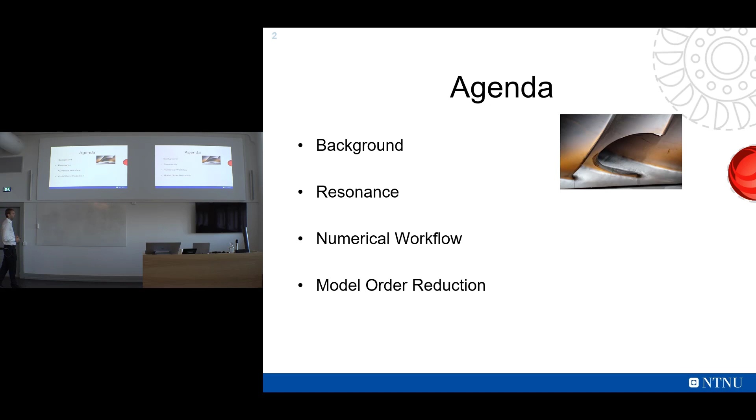Again, welcome everyone on our committee, professors, family and friends, to my PhD defense, titled, as said, Numerical Simulation of Fluid Structure Interaction in High-Head Francis Turbines. It's quite a mouthful, and hopefully it will make a little bit more sense in about 45 minutes. The setup will be similar as earlier today. We'll go through a little bit on the background. We will look at the mechanical phenomena of resonance. The main part of the presentation will be a numerical workflow for simulating these phenomena, before we will end with a little bit on model order reduction.

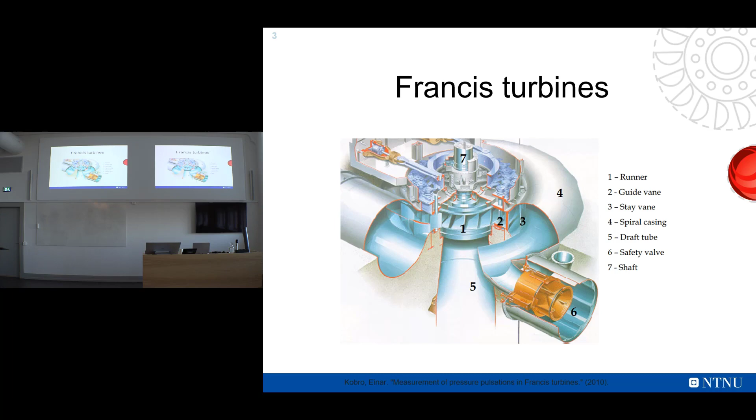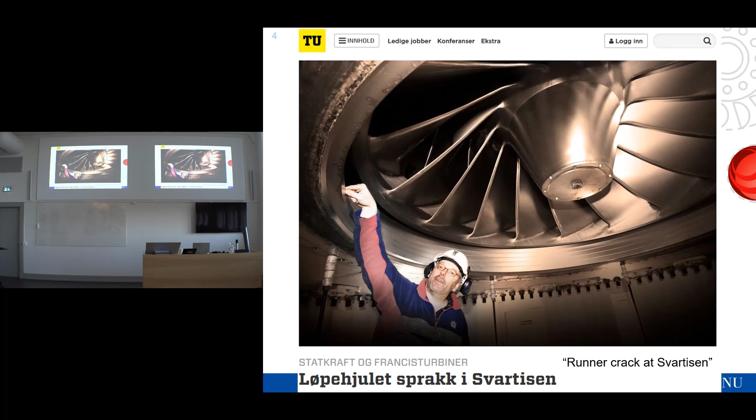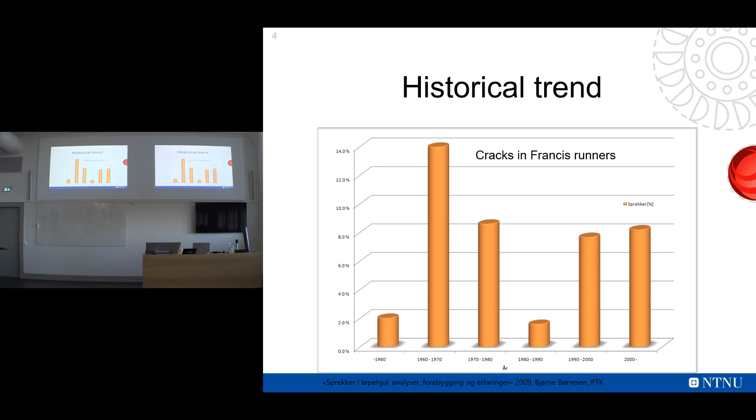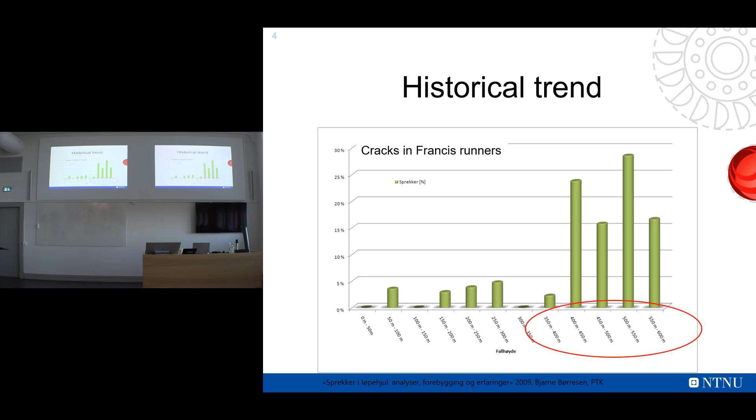This is what I mentioned earlier. Because you have something that is rotating inside some stationary components, you have some interaction between the two. So every time a rotational blade passes a stationary blade, something happens. And it's easy to imagine that there has to be some acceleration of the fluid, there has to be some deacceleration of the fluid, pressure pulses that are created and propagated through the system.

The thing is, we now have turbines that fail. We know that RSI is the reason or the main dynamic source of load, and we even know the frequency of this phenomena. But still the turbine fails. So somehow we are unable to calculate the actual load of this phenomena. And now we have narrowed the problem into what I'm going to talk about today, calculating the load inside these high-head Francis turbines.

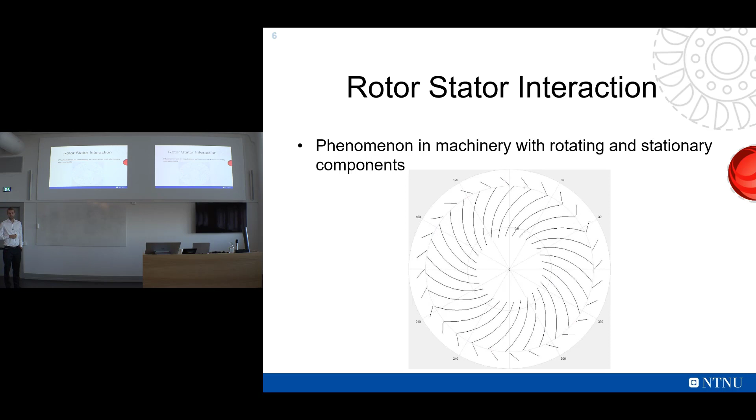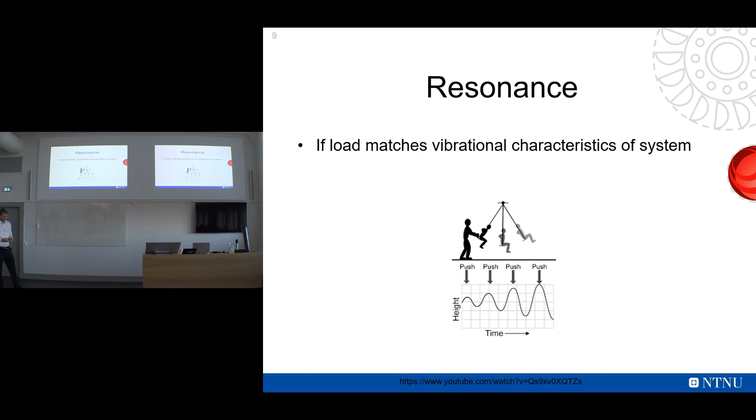Next up is resonance. I guess most of you have heard of resonance. If you want to explain this in one sentence, we could say if a small load is applied at the right place and at the right time, then the amplitude of vibration can be magnified outside of control. You could have catastrophic failures. In most textbooks, this is visualized using a swing, because everyone intuitively understands the swing example. Also as illustrated here. And everyone can see why this isn't working.

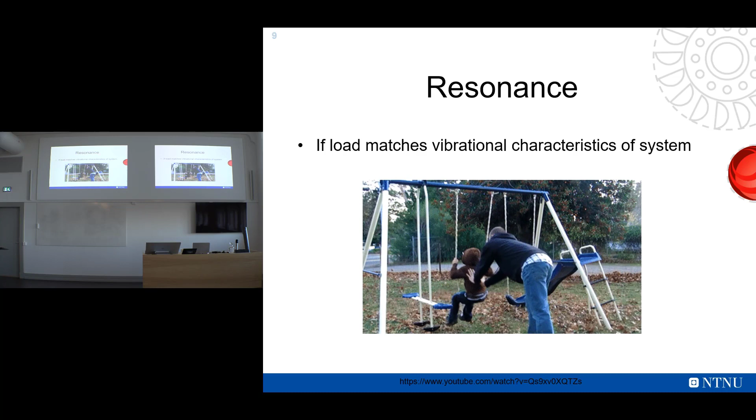The guy here, his father, I guess, is pushing at a frequency that is way too high. If he was a little bit more patient, the swing would gather momentum and the kid would have a better time. Resonance you'll find in all systems. Researchers in California have recently discovered that if you don't adjust your step, you'll spill your coffee within the first 10 steps.

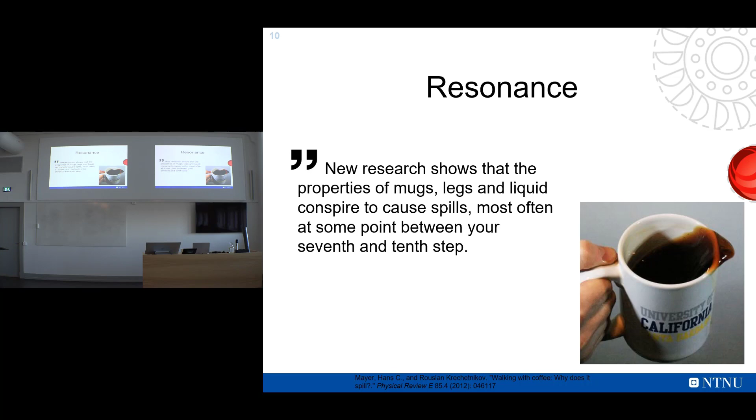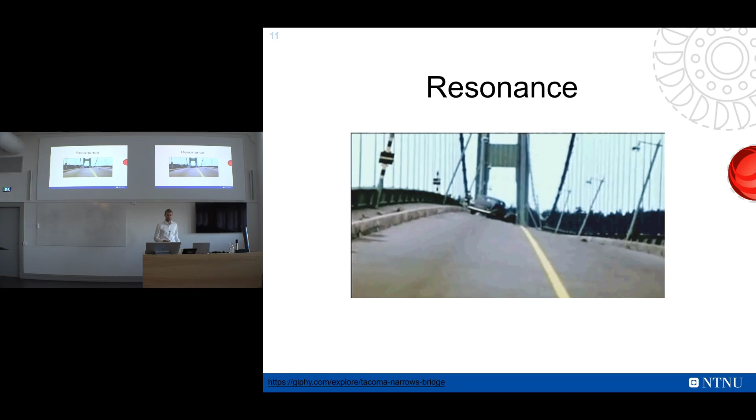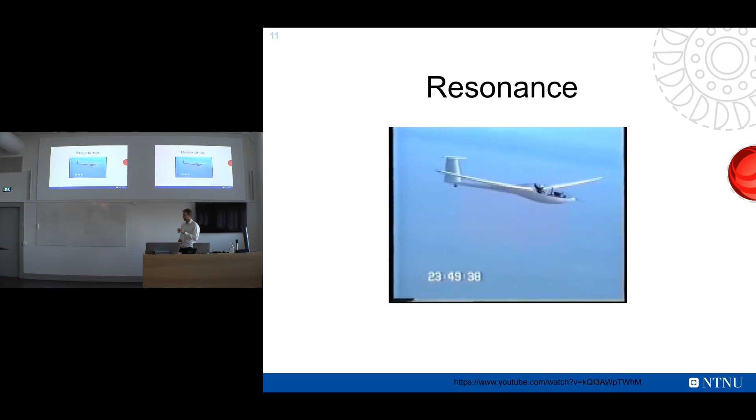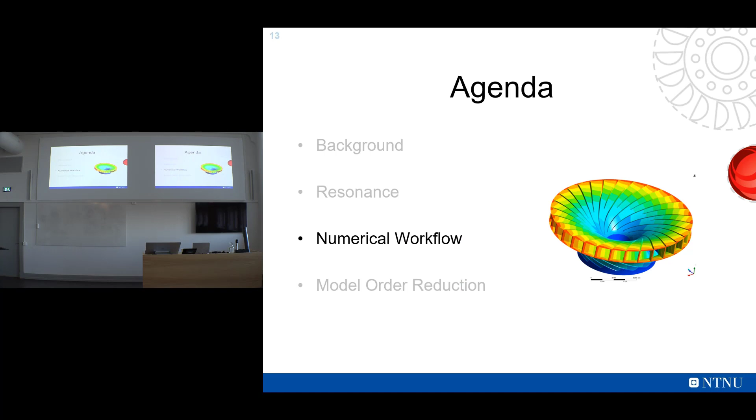So now to the main part, the numerical workflow. First, I'm just going to mention the geometry we've been working on. First of all, we've been working on the Francis 99 model runner. It is located here at the university. It's open source. You'll find geometry, experimental data, everything online.

What I have focused on primarily is the onboard pressure taps. So alongside one channel, we have several pressure taps that can measure the pressure inside the runner, and that's the load, that's the pressure field we are interested in. That's what makes the blades fail. Additionally, we have been looking at a simplified model of a blade named the Francis hydrofoil. It's a linear hydrofoil, and it is also open source, geometry online, experimental data online. And in this experimental rig, we have looked in more detail at the physical phenomena of damping.

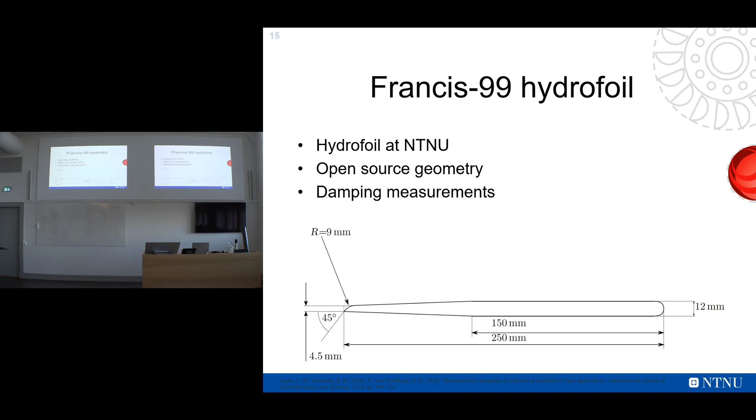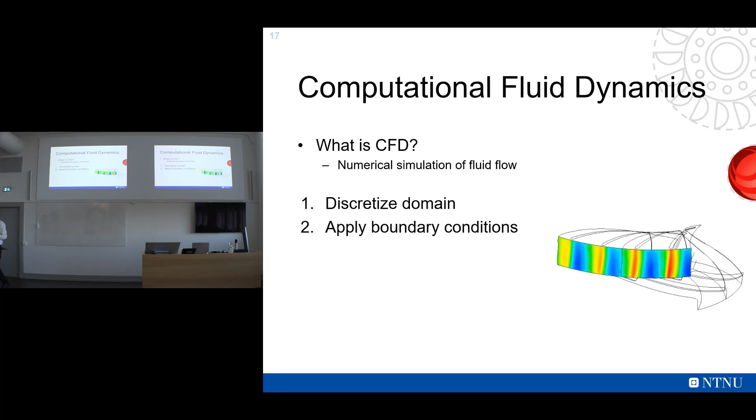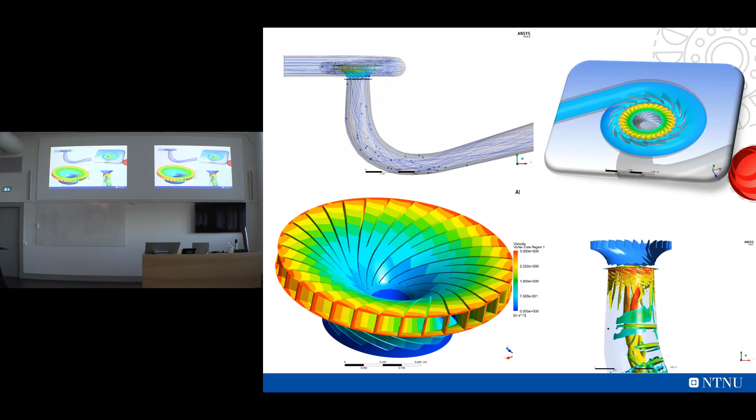If you're going to break it down to a series of simple steps that you have to go through, you have to discretize your domain. In all numerical simulations, you have to take a part of the real life and you have to discretize it. You have to apply some sort of boundary conditions, if that's mass flow, if it's pressure, rotation for that matter. And finally, you solve the Navier-Stokes equations, which are the governing equations for fluid flow. When doing CFD, you can get everything you like in the flow field. You can get streamlines, you can follow particles, you can look at pressures, you can look at turbulence phenomena, and so on and so forth. So it's a wonderful tool if used correctly, and it is becoming one of the most important research tools in fluid mechanics and hydraulic research in general.

You can find all this, but my main focus, as I mentioned, has been on the pressure inside the runner, and specifically the pressure in the 4 points that the experimentalists have gathered data.

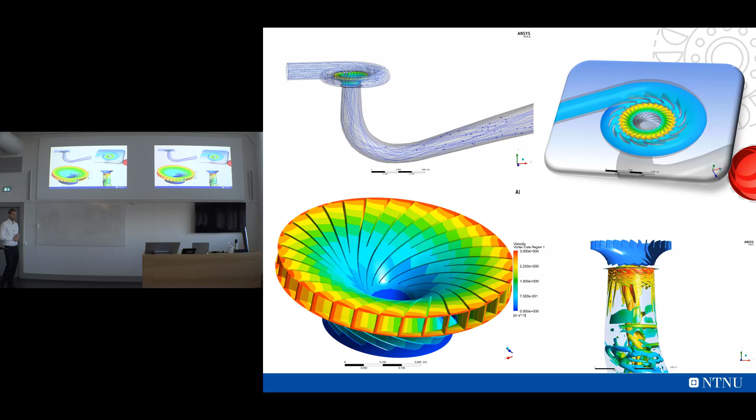Here you have an animation of the pressure field. A couple of interesting things. You can see, first of all, there seems to be an up and down, oscillating motion through the channels, which means that if we were to plot this in one point, we would see some variations. You can also see that there is some sort of rotational motion here. There seems to be some global pressure field.

The channels are not experiencing the exact same pressure at the exact same time, which means that there are some variations in the circumferential direction as well. We'll get back to what this means a little bit later on.

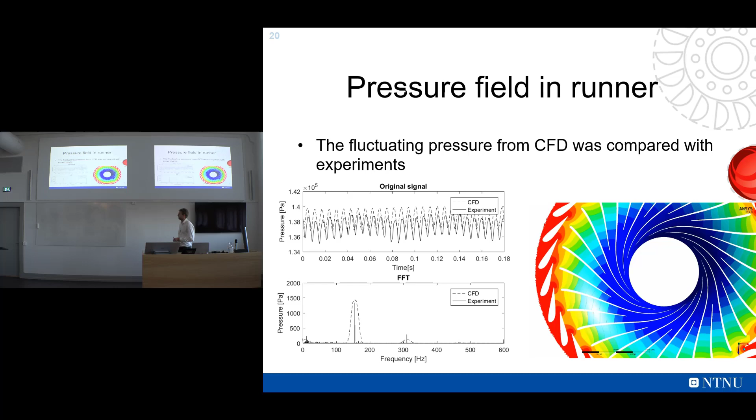If we pick one of these pressure taps in the runner and we plot the CFD data with the experimental data, we get a very good correspondence. There is a slight offset that's due to the boundary pressure condition, which is basically just a numerical artifact. If we plot this instead in the frequency domain, we see that the amplitudes and frequency correspond very, very well.

But what's going on here? For some reason, we are under-predicting the experimental pressure by 75% or more. So what is this pressure? What's the phenomenon that we are unable to simulate? This is my first paper, and of course back then I had no clue what was going on. Hopefully we'll see in a while what that pressure is.

If you look at all the pressure probes, these are the pressure probes sequentially along the channel. Every single pressure probe, this is the amplitude of the second pressure harmonic, is consistently under-predicting the experimental pressure. And not only under-predicting the pressure, but also missing this trend. The trends aren't even the same. So it's not a factor of error. In experiments, we see an increase in some of the probes in the channel. In the CFD, we do not.

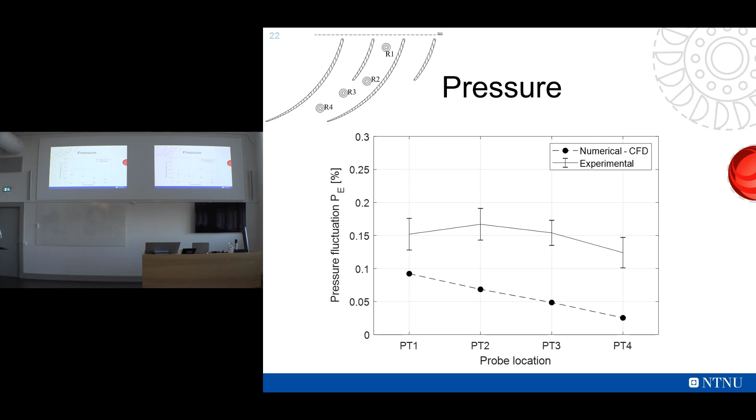So this is basically the background for the project. Because if you remember resonance, if a small load is applied at the right place and at the right time, then you can have a catastrophic failure. So if this is the right time, and we under-predict the load by 75%, then our lifetime estimators will be useless. And that was the basis for the further work here.

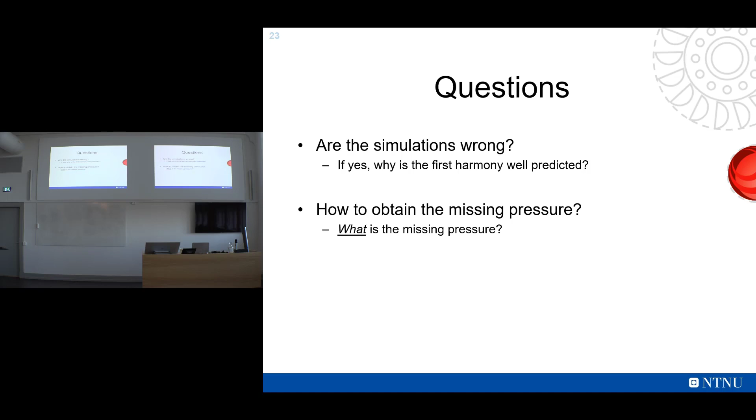And we did have some questions. What is this? Are the simulations wrong? What is the missing pressure? And we will get back to some of this. Moving on, we have the modal analysis. Modal analysis is a study of vibrational characteristics.

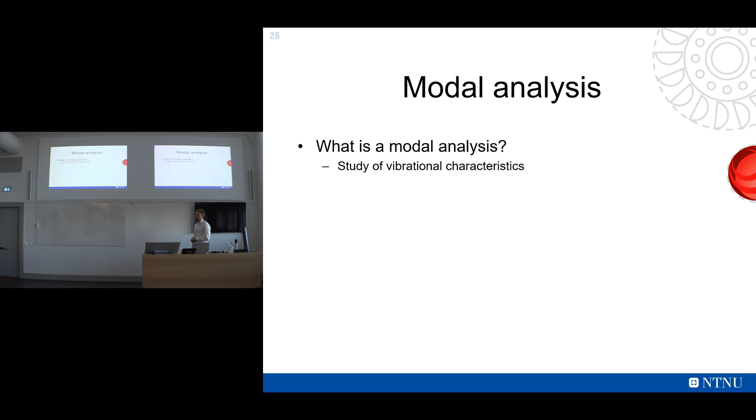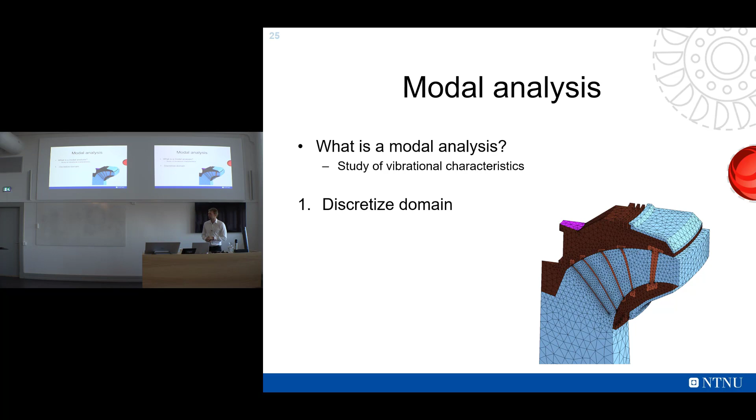And what does this mean? First of all, I can go through a series of similar steps as in the CFD. You need to discretize your domain. We are now on the structural side of things. You need to discretize your domain, here illustrated by a turbine runner. You need to apply some boundary conditions. And what you solve here is something called an eigenvalue problem.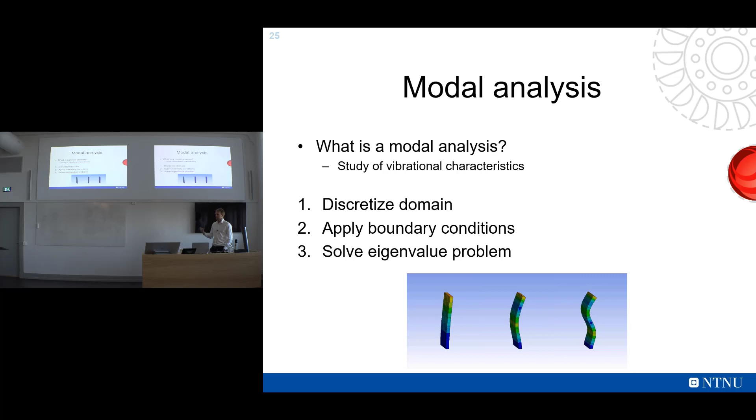And in an eigenvalue problem, you get two things. You get an eigenvector and an eigenvalue. Physically, this corresponds to a natural frequency and a mode shape. And a mode shape is the vibrational shape of a structure. This is illustrated here by just a fixed beam. The three first mode shapes of this beam, and each of these mode shapes has a corresponding natural frequency.

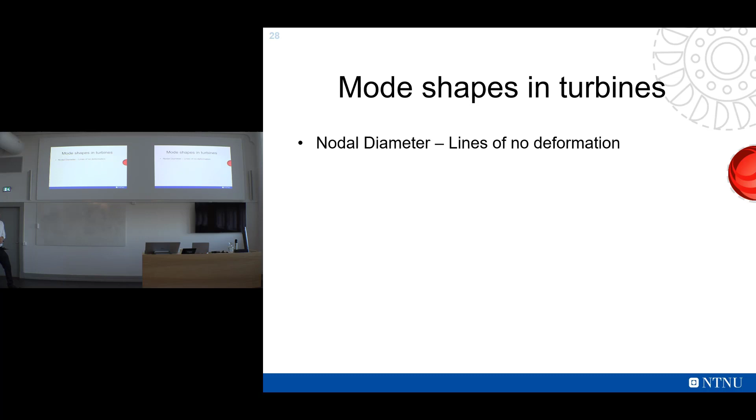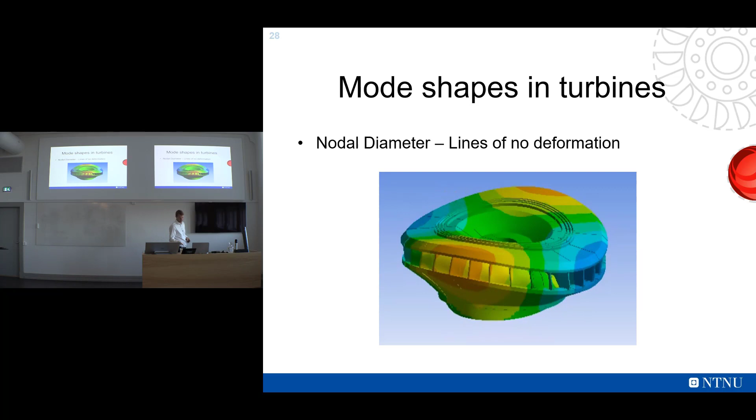Now we can finally move on to an assessment stage, where we ask, is there a risk of resonance? And that's quite a hard question to answer. But as I said, in resonance, if a load is applied at the right time and at the right place, then something bad can happen. So obviously we need to compare the load from the CFD with the vibrational characteristics from a modal analysis.

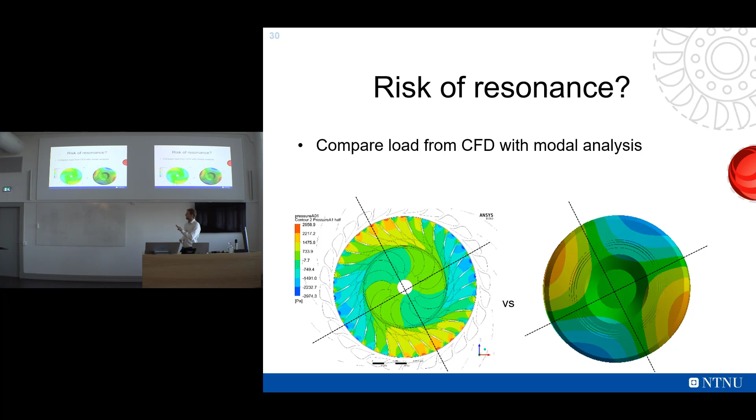We have to consider, though, that in terms of vibrations, we're not looking at the absolute pressure field, we're looking at the pressure fluctuations. So if we decompose this pressure field into a mean component and its fluctuating components, it can look something like this. And some of you will probably see that these correspond, which means that there is a potential risk of having resonance here if the frequency matches the natural frequency of the runner.

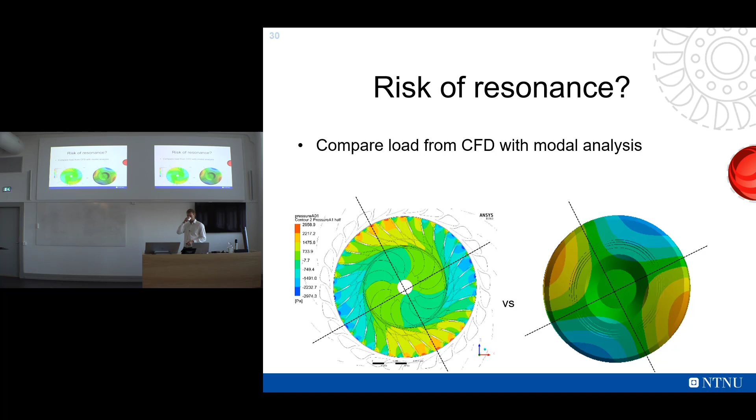And comparing frequencies should be fairly straightforward. And it will rarely match perfectly. But how far away can it be for safe operation? Is 5% enough? Is 10% enough? Is 20% enough? I know several companies use 20% as this safety factor in terms of how far away you should be from a natural frequency.

I'm just going to illustrate here how dangerous that can be. This is a dynamic amplification factor. I have created this by applying a load in a harmonic manner, an oscillating load, and I have extracted the vibrational amplitude. I have divided this number by the amplitude if the same load was applied statically, which means this is actually just a visualization of a resonance issue. What we see here, for example, is that at the eigenfrequency, the amplitude is about 75 times higher than if you just apply the load statically. So it shows the danger of resonance.

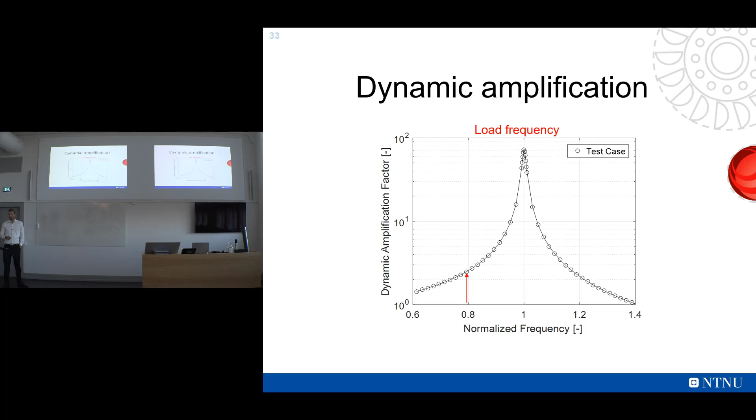And let's say you are 20% off. You have then a magnification factor of about 2.5 maybe. And that's okay, you can add some safety factors elsewhere. But let's say your calculations of the eigenfrequency miss by 10% or something like this. Suddenly you're here, and your magnification factor is 10. And all your fatigue calculations will then be useless. So suddenly you have a load that is a lot higher than you thought initially.

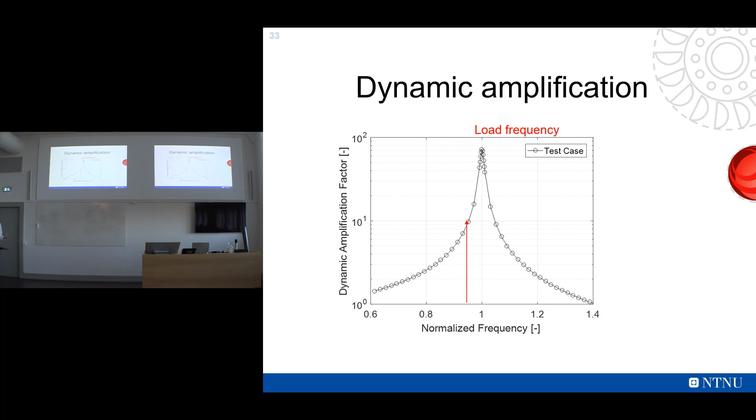So the safe thing, of course, is not to use this rule of thumb to assess, okay, we are in a safe region. The safe thing is to continue along this workflow and actually get a number quantifying this issue. This is done in a harmonic analysis, but before we go there, we need one critical input, which is the damping factor.

Damping, well, first of all, damping is a mechanism that extracts energy from a system. If there were no damping, you would have infinite vibrational amplitudes, or you would have vibration that lasts forever, none of which are physical, of course. In terms of a structural analysis, this is one of the key inputs. The fluid that surrounds the structure, the vibrating runner in this case, of course, exerts some sort of pressure field on the runner and also damping.

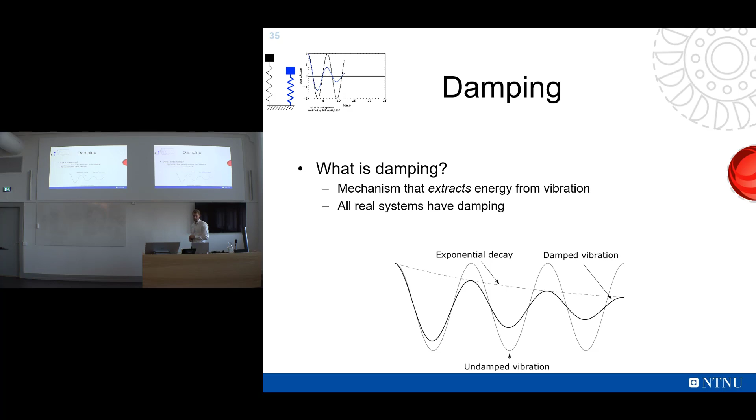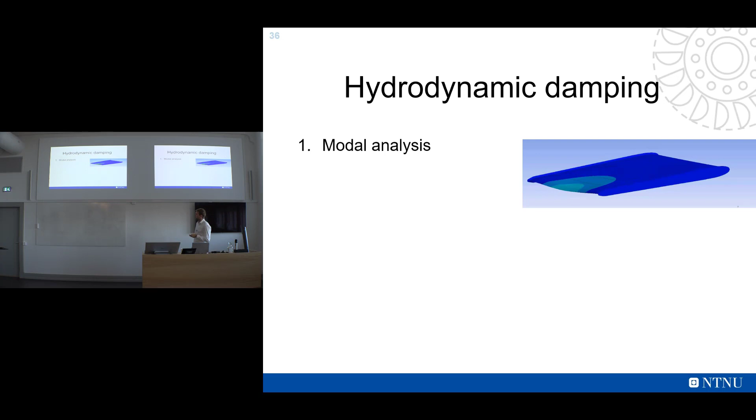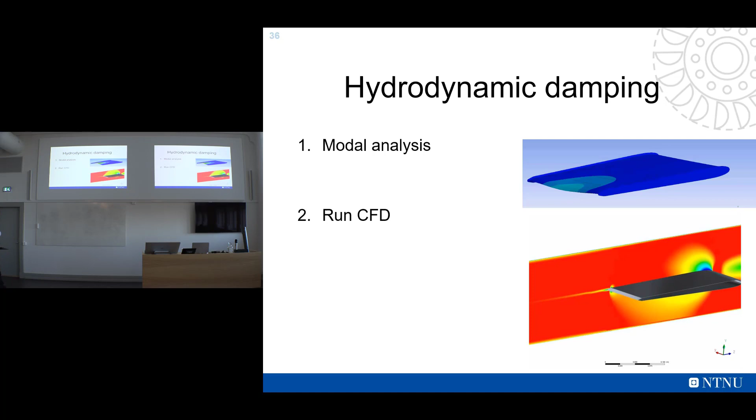This is called hydrodynamic damping, and one of the main research focuses for me has been to calculate this damping numerically. How we do this is start off with a modal analysis, and from the modal analysis we get something like this. Now I'm talking about the hydrofoil geometry, as you can see. We then scale this vibration to a realistic amplitude. This is of course completely unrealistic. We scale this to a realistic amplitude and we load it into a CFD analysis. We then let the water flow across this hydrofoil, which is now oscillating, and we extract the work on the blade or the work on the water from the blade.

In a real-life situation, this work from the blade onto the water would be energy that is taken from the blade, damping the oscillations. We take this work and we normalize it by some factors, and we use this as an estimate of this damping, the hydrodynamic damping. Carl, who's in the audience, has done experiments, and I've done this numerically, and we compared the damping, and we get a very good correspondence between the numerics and the experiments.

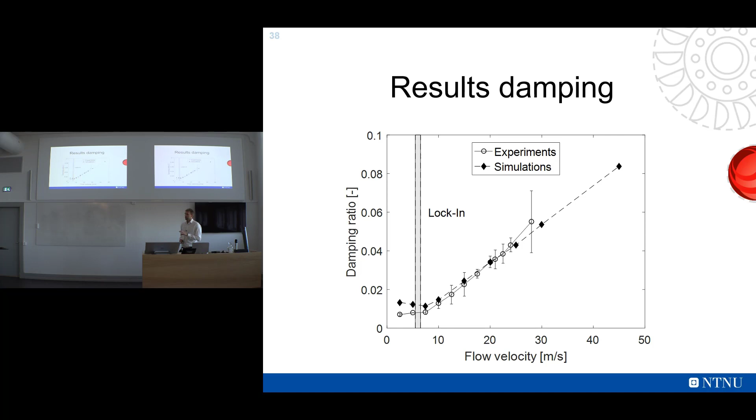When you have an estimate for the damping, you're finally ready to do a harmonic analysis. And what is a harmonic analysis? Well, we are in the structural domain, first of all. And as opposed to modal analysis, you're now looking for the actual amplitude of vibration. A modal analysis is undamped, it's unloaded. This simulation is damped and loaded. So you get the actual deformation due to an actual load.

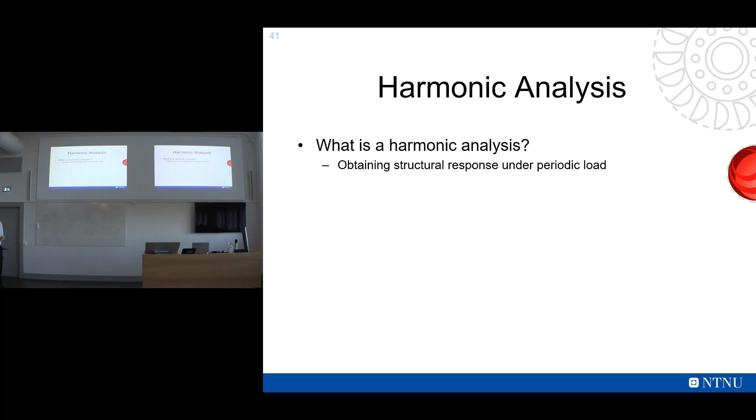Similarly, you need to discretize your domain. You need to apply boundary conditions, and in this case you solve the harmonic equations, which is the second order oscillating system expressed as a harmonic set of equations. In step 2 here, when you apply boundary conditions, that applies also to the CFD load. So the pressure field from the CFD analysis, which was the first step in this workflow, is then applied onto the structure as a boundary condition.

The damping that we obtained in the previous step is also implemented, and you solve this, and this as well is exaggerated motion, but you get some deformation shape that can look something like this. And this is now, not in the animation, but the result is now the actual deformation due to this CFD load.

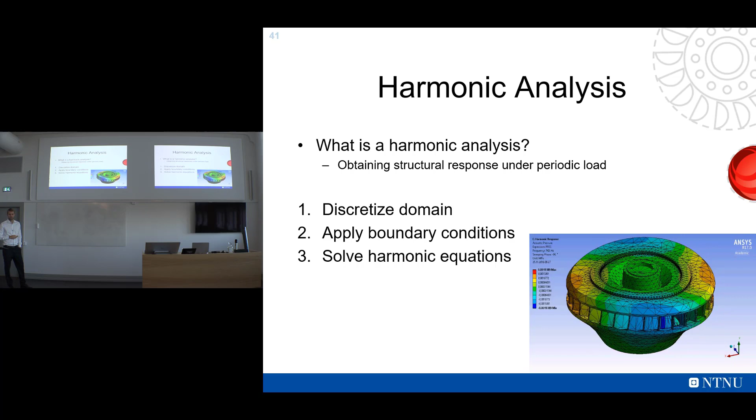Two words about something called acoustic elements. This structure is submerged, and because of this, there are two phenomena we have to consider. When a structure is submerged in water and it wants to vibrate, it has to displace the water around it. This water has a density, a weight, and it will exert an opposing force to this vibrating structure. This phenomenon can be modeled as if the structure itself is heavier. It's then called the added mass effect.

I haven't mentioned it explicitly, but the natural frequency of a structure is inversely proportional to its mass, which means that if the structure is heavier, the natural frequency will be lower. And again, because of resonance, because you have to compare loads and vibrational characteristics, it's highly important to calculate the correct natural frequency. So having this added mass effect is of absolute importance. And I think not doing this correctly is probably one of the reasons that many turbines have failed in the past.

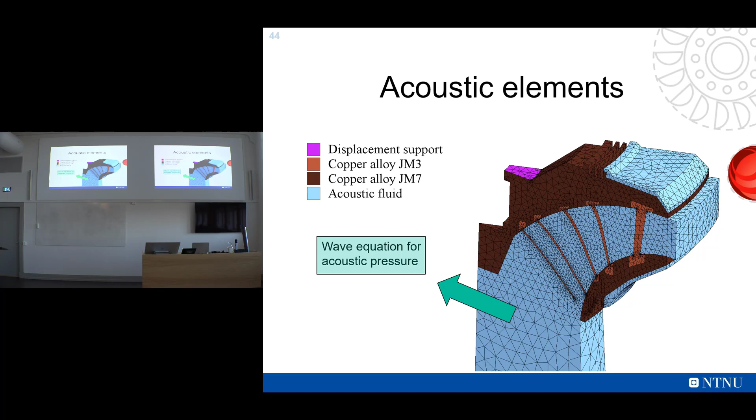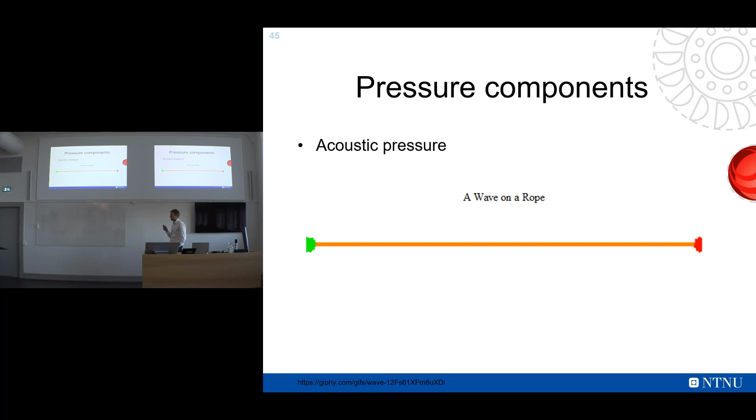The easiest analogy I found was this. Everyone has done this: two people holding a rope, and you can send a wave across this rope. So the rope isn't going anywhere, in the same way that acoustic elements in the structural analysis are stationary. There's no bulk motion, but it acts as a medium that can transmit energy. So this is one pressure component. The pressure from the CFD is another pressure component. And now we are going to add them together.

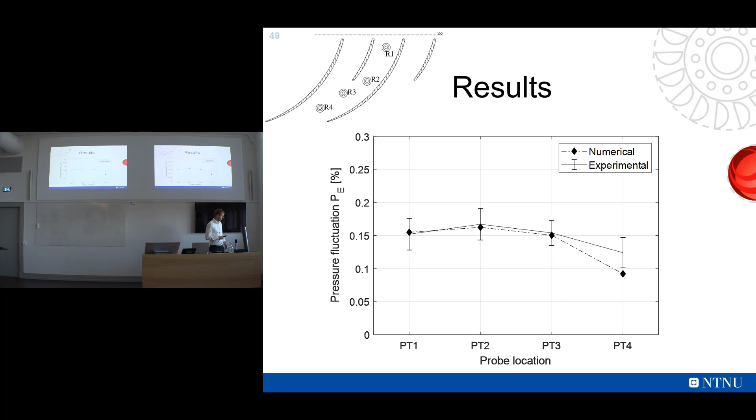This you've seen before. This is the amplitude of the second pressure harmonic in all the pressure probes in the experiments, and with CFD only. If we were to add the acoustic element, the acoustic pressure from the harmonic analysis, it looks like this. So suddenly the whole issue of the missing pressure, as I called it, is gone. There are some discrepancies at the outlet. That is due to some details in the bolting of the Francis 99 model runner.

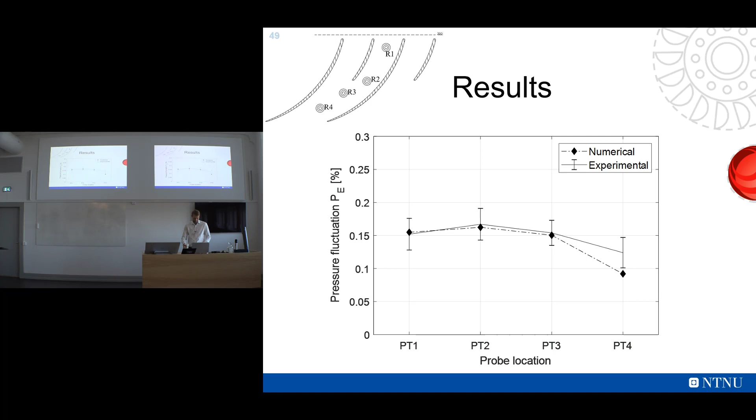The experimentalists have actually somehow been able to split the pressure signal from the experiments. Don't ask me how. So this way we can actually compare the convective or viscous or CFD pressure, experiments versus numerics, and it's almost spot on. And this was exactly what we saw in the first harmonic as well. We are able to simulate this phenomenon. And then we have the acoustic component here, and again we have some discrepancies at the outlet. And I think this is the first time this is shown, because the experimental data was only released a month ago in another PhD thesis, and it's very good.

It shows us that the CFD was not wrong, and it shows that this workflow of separating the pressure into two components is working.

Well, so to sum up, the missing pressure, the phenomenon we were unable to simulate in the CFD analysis, is then the acoustic pressure. I should also say by now that the acoustic pressure will only have a substantial impact on the pressure when you are close to resonance conditions. As you saw earlier, in this graph that showed the amplification factor, if you are way off the natural frequency, the contribution will be close to 0.

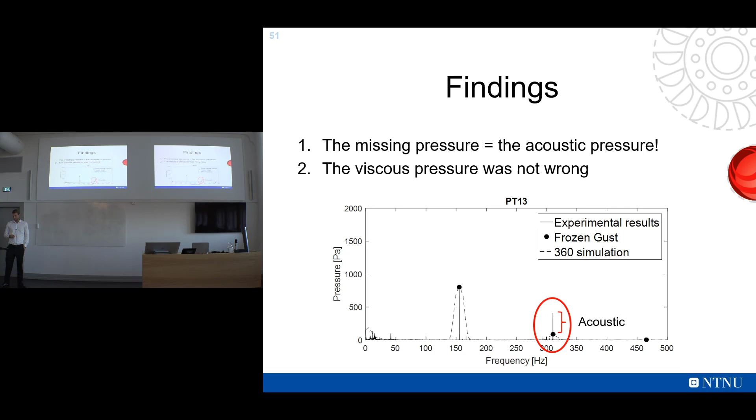To summarize the workflow, if you have a CFD analysis and you load this pressure onto a structure in a harmonic analysis with a reasonable damping estimate, you will get the same pressures as you do in the experiments. And that's a tick off. However, there is one more issue we need to talk about in numerics, and that is time consumption.

Some of you are familiar with these procedures, some of you are not. Let's say you simulate just one rotation of the runner. It takes, in real life, a fraction of a second. On a supercomputer, with hundreds of computational cores, it can take weeks. Just one runner revolution.

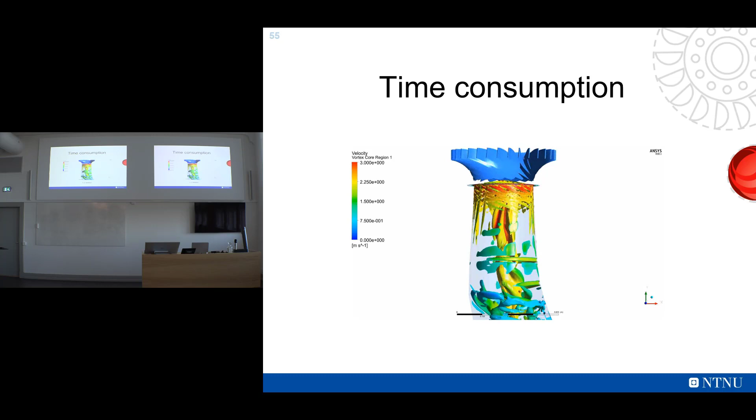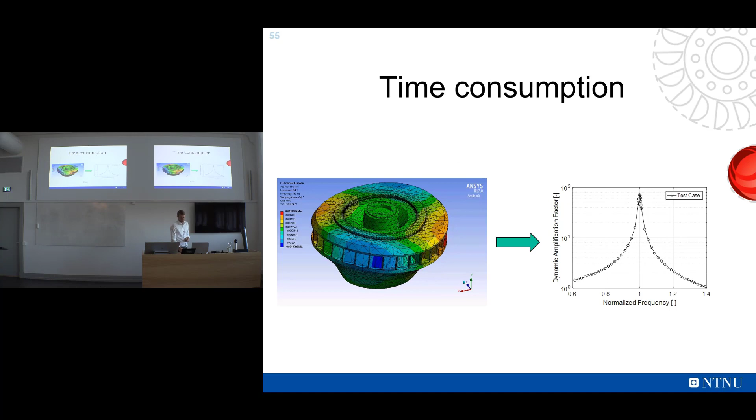Let's say you have this pressure field, you load it onto your structure, you want to look at sensitivity with respect to damping, maybe you want to test the sensitivity with respect to where you are in terms of the natural frequency, maybe you want to create one of these plots like this. We're talking additional days of simulation. That's why the final point on the agenda is going to be some model order reduction procedures.

A model order reduction, what is it? It's a mathematical field of its own. It can be described as a way of reducing the complexity in a system. I'm not able to give you this 3-point checklist as I have for the other modules, because there is no one-size-fits-all method for this, unfortunately.

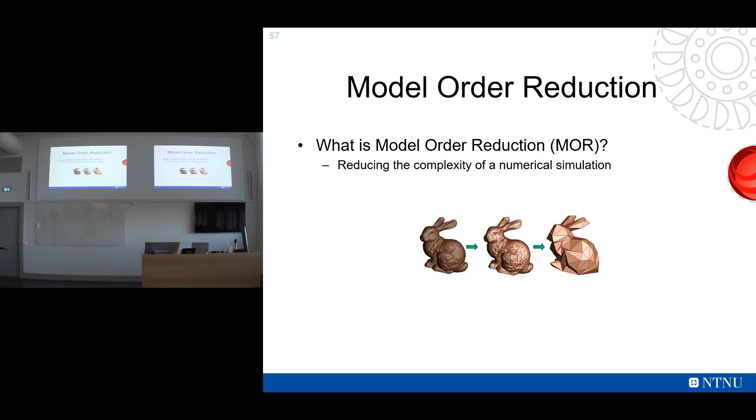The principle is, as in the figure here, you're going from something that is complex to something that is a lot easier, but you retain the most important information in the system. This is, by the way, not at all what we've done, but it illustrates the goal very well. As I said, something like this is not possible. You can't just drop a model order reduction on top of this whole procedure. I'm going to just briefly mention what you can do in some of the modules.

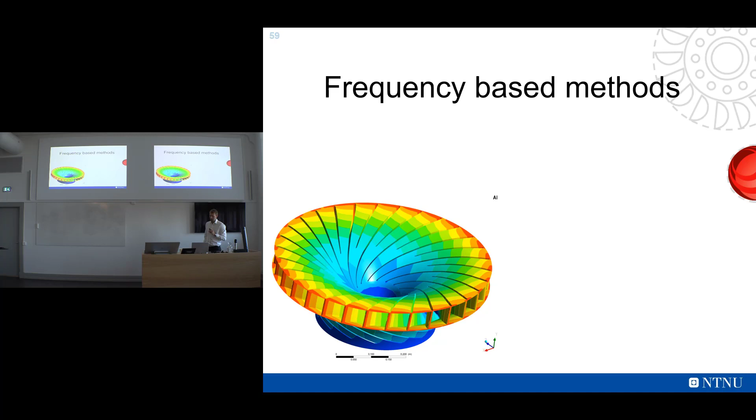On the CFD side, there is one dominating procedure, and that is using frequency-based methods. One of the most time-consuming things in a CFD analysis is the time-stepping procedure. You need a time resolution that is very good. You need to resolve all transients, and so forth, which can be fixed by using frequency-based methods. Another thing you can do with frequency-based methods is actually to reduce the domain in space as well. So this method actually works in space and in time.

What you do is use the fact that this runner is rotationally symmetric. The pressure field has a certain global shape, a certain circumferential variation. You can use this as a boundary condition, periodic boundary conditions, on just a section of the runner. You can specify that whatever goes in on one side is not what goes out on the other side right now, but it was what went out on the other side maybe a fraction of a second earlier or later. So it's a so-called phase-shifted periodic boundary condition. We implemented this and we got a speedup of about 5, which is very good. That's the difference between a day and a week.

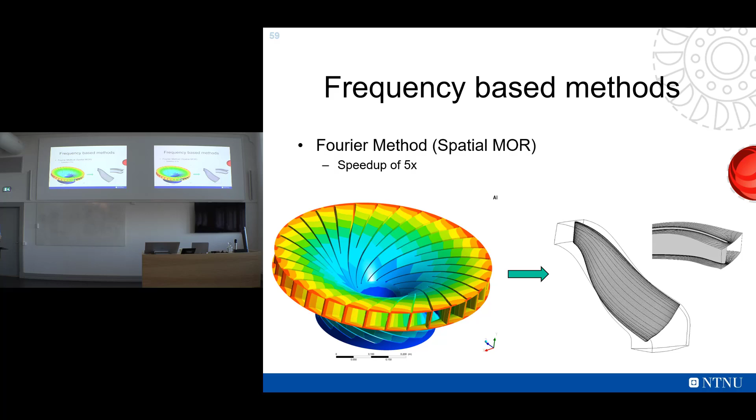This could, in theory, give spectacular speedups, but this has been, in my experience, a bit unstable as of now. But in the future, I believe this is going to be the go-to method.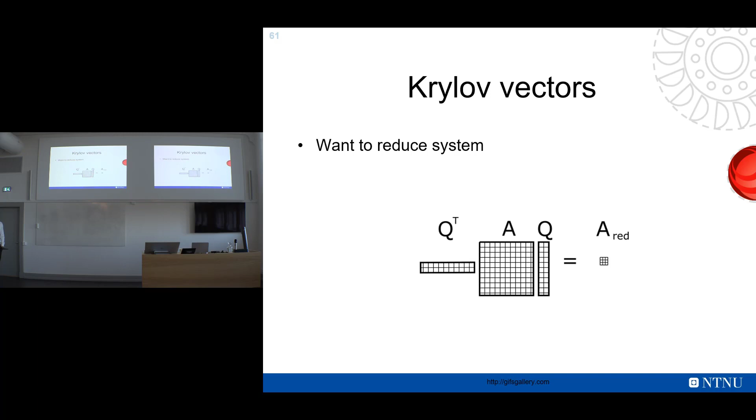What you need to do, of course, is to find the set of vectors that makes the reduced system resemble the original one to the best degree possible. Krylov vectors is a vector space that does exactly that. It is fairly advanced mathematically. What we do in essence is that we take the transfer function, which is basically the dynamic response of a system, and we express this by a series expansion, which means that the more vectors you add to this series expansion, the closer you get to the actual dynamic response.

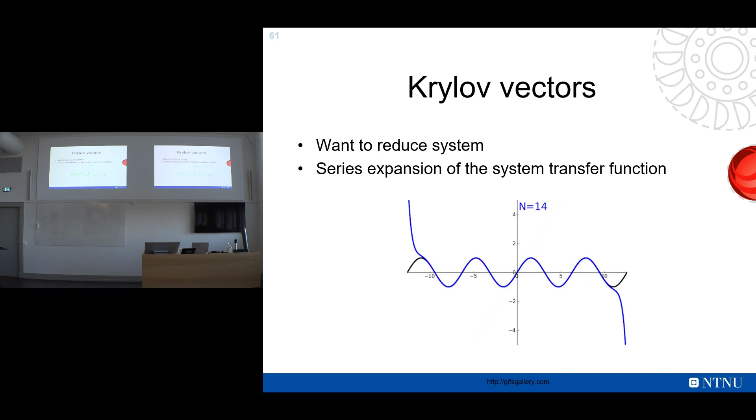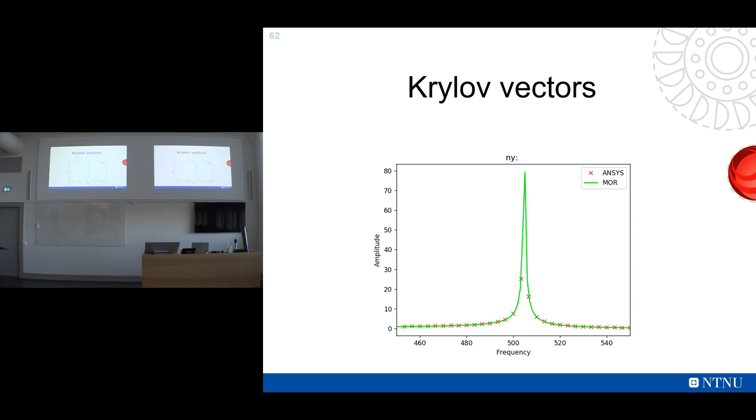We then implemented this into ANSYS, the numerical software, and we ran a series of cases where we compared the full solution from ANSYS to this model order reduction procedure. And the results were close to numerically perfect. This is on the hydrofoil, and we see in the line is the reduced model, and the crosses is the full ANSYS solution. Another example here, the same, the reduced order model in the line.

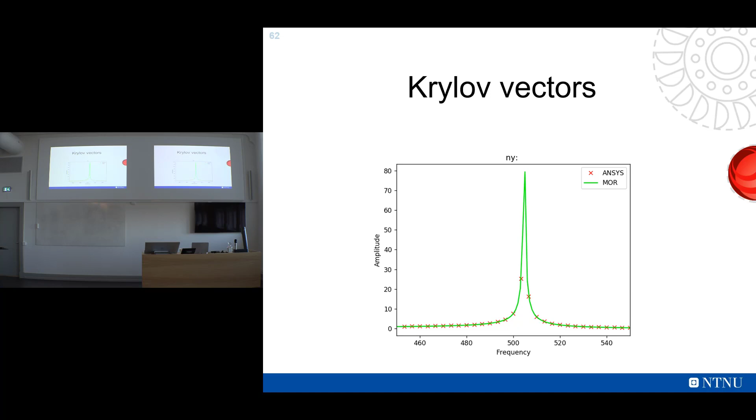And here in this case, with low damping, we actually see that the reduced order model is better at finding the exact point of resonance. And most importantly, the speed up is very, very good. It is always one order of magnitude faster, in some cases close to 40, 50 times faster. Of course, dependent on how many frequencies you are to investigate.

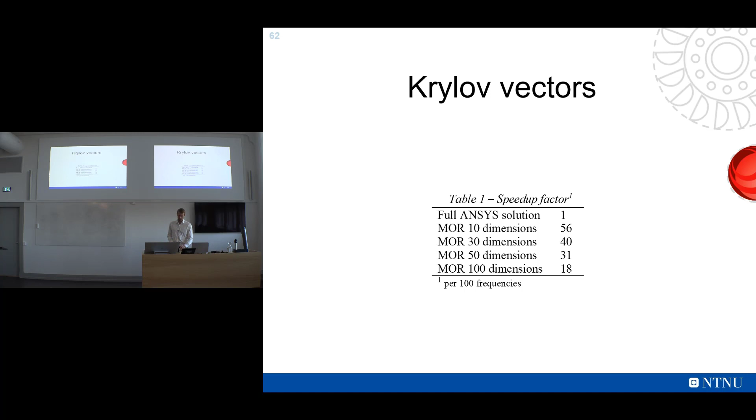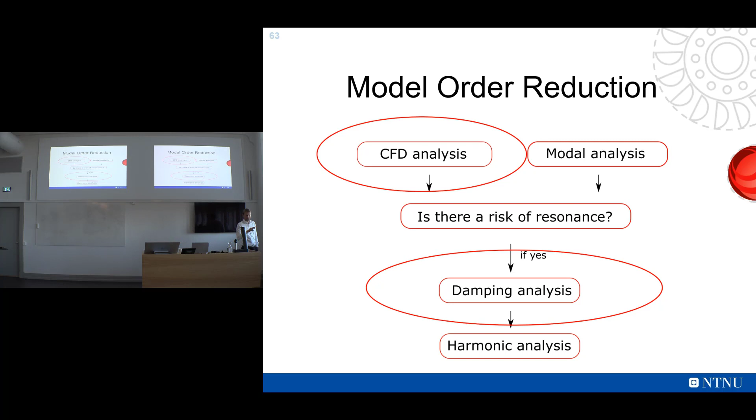The very last method I'm going to talk about is related to something I haven't covered at all yet. It is two-way fluid structure interaction. Two-way fluid structure interaction is in most cases, and definitely in the industry, way too time-consuming. If CFD is time-consuming, then you can probably add a factor of 5 on this to get the two-way coupling. But in some cases, it is interesting to have a two-way coupling. In some cases, you need a two-way coupling.

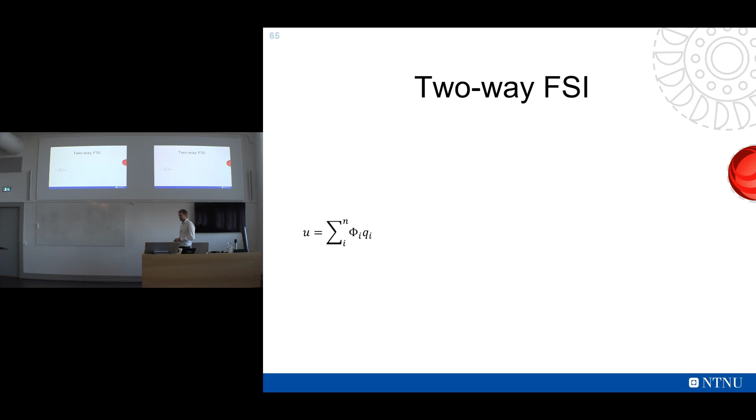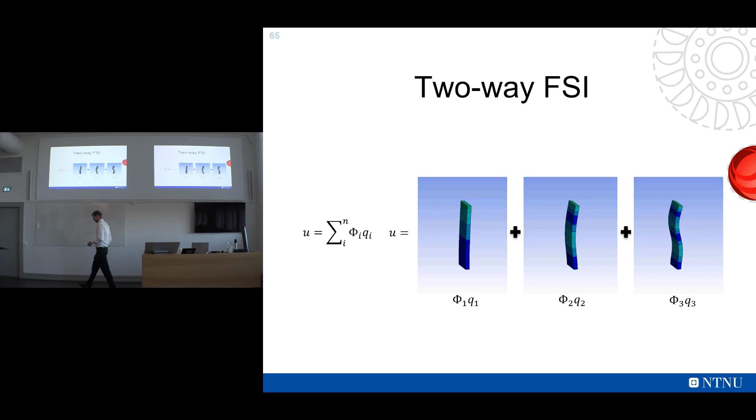What I did is something that is based on mode decomposition. It is close to what you do in a modal analysis. I expressed the structural deformation as a weighted sum of its eigenmodes. Visually, it looks like this. You have deformation, which is a weighted sum of the different mode shapes. The problem is now how to find these weights. This you can discretize, and you can actually import it into the CFD solver.

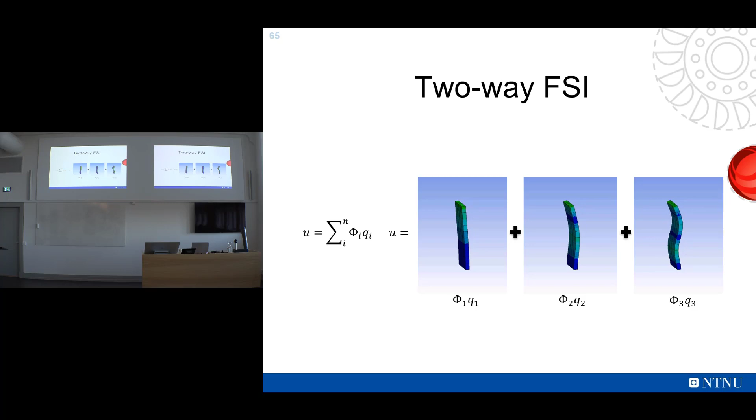So that's what I did. I wrote a set of equations. I loaded everything into the CFD solver, and I let the fluid pressure on the hydrofoil calculate the different weights. So how much should mode shape number 1 be weighted, and the second, and so on and so forth. And this way you actually get the actual deformation. So you're not prescribing a frequency in advance, you're not prescribing an amplitude in advance, you let the fluid pressure from the CFD analysis calculate this by the use of the modal decomposition method.

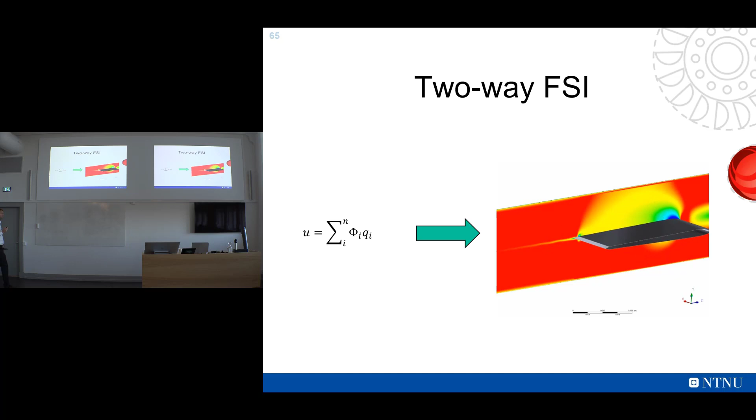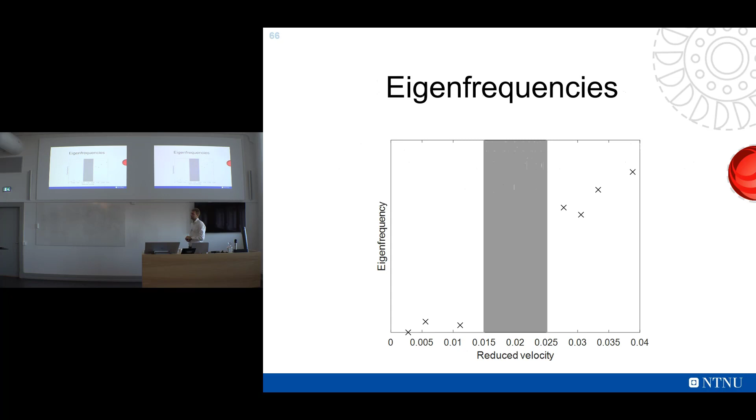To sum up, I just added a small point here that if you do the CFD, if you do everything, you will get similar results as experiments, and all of these individual components can be sped up.